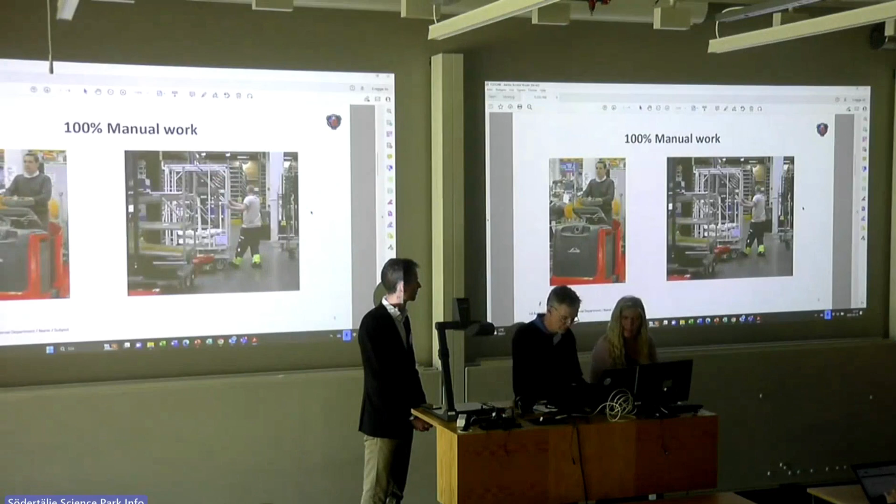So what we have been working with at Scania for quite many years now is train supply. Something around 2010 or something like that, we introduced trains to supply material from our picking platforms or supermarket to the line. So we have developed that during the years. We have a concept that's called mother and daughter.

So we have a fixed wagon, the red one, and then we have the carts, and they are called the daughters. So we can easily insert the daughters, go out to the line, and then take them out and supply them to the line. We introduced takt, so we know if the line is going in the takt. We also have logistic takt, so if the line stops, our train will stop. And we also have a specific way to configure the different carts. So it's working quite well.

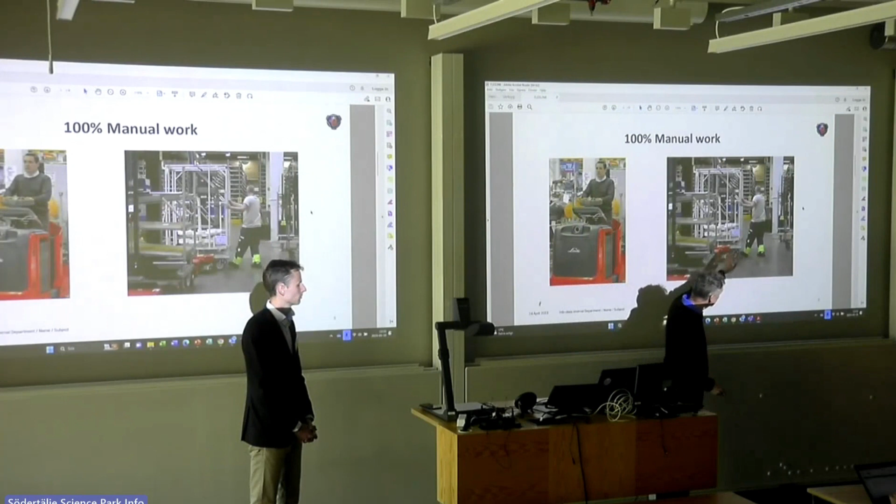But it's still 100% manual. So there is a driver driving maybe up to five wagons behind. And every time we supply, the driver needs to stop the train, go maybe 20 meters to the last wagon, and then manually take out the cart, drag it and push it into the line, take the empty one and bring it back into the train, and then go back. That's the way you do it.

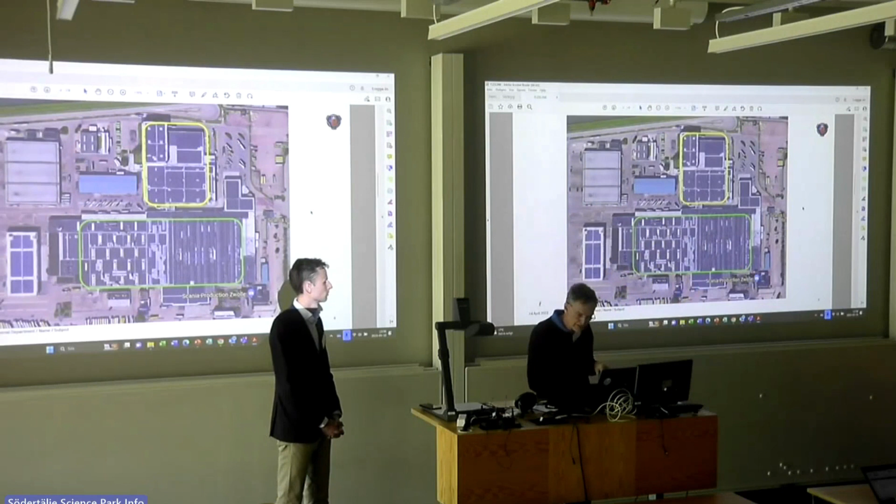And just to understand, we have different workshops and they are designed as they are, and that affects the solutions that we are looking into. So this is one example, the logistics in the yellow one. This is from Zwolle in Holland, and this is the production, the green one. So we go from the yellow to the green and bring the material, and it could be up to 900 meters, and all trains or material must pass this one. So you can imagine this is really a bottleneck. So they understand we need to have trains because we can't go one by one.

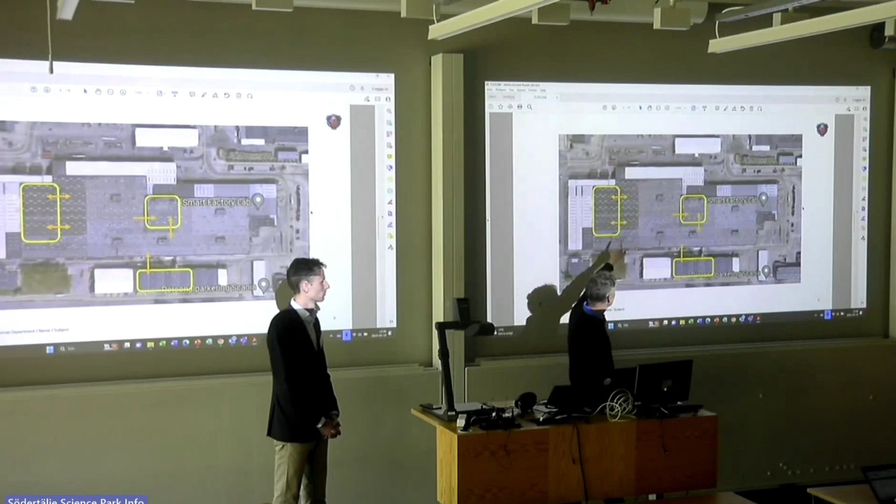If we look at another workshop in Södertälje, we have supermarkets more distributed. We have up to three areas and plenty of openings so you can easily go in and out. In this workshop, we will most likely go for single piece flow. So we take them one by one because the distance is much shorter. The distance to travel on a route is about 200 meters.

And then, of course, we have this big thing now that we are looking into. We would like to automate. The trend of AMRs and AGVs is booming everywhere. You can find a lot of automation in this area. And we want to have 100% automation. We want to deliver the parts to the line without any humans at all. And that is, of course, the challenge, especially with the train.

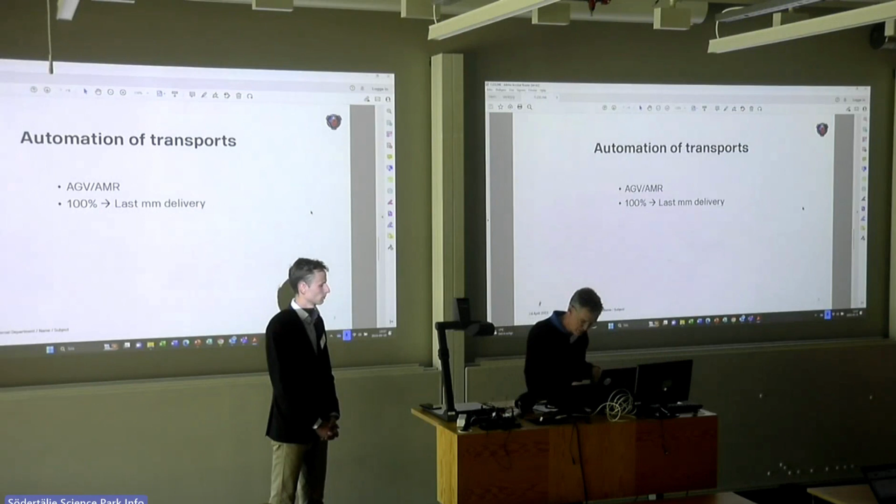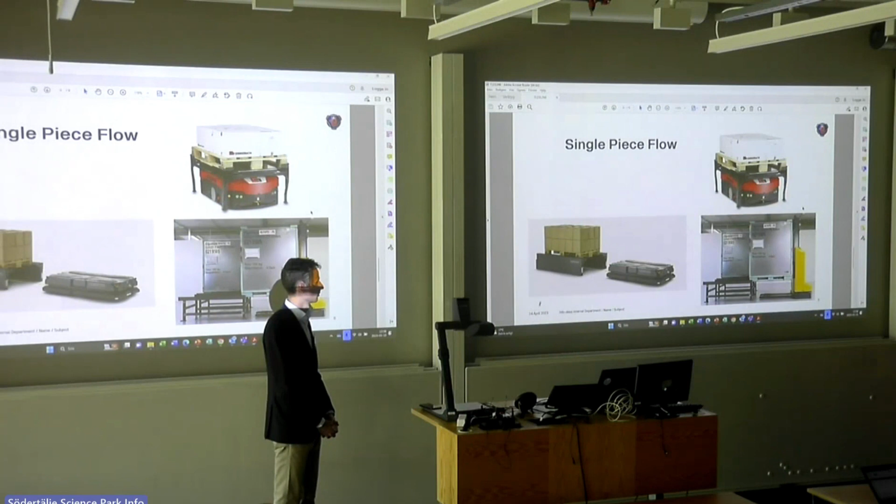So these are three concepts that we are looking into. We don't know yet which one is best. We are installing that one right now and that one, and we are looking into a solution for that one. So it's still a big area to understand what's best.

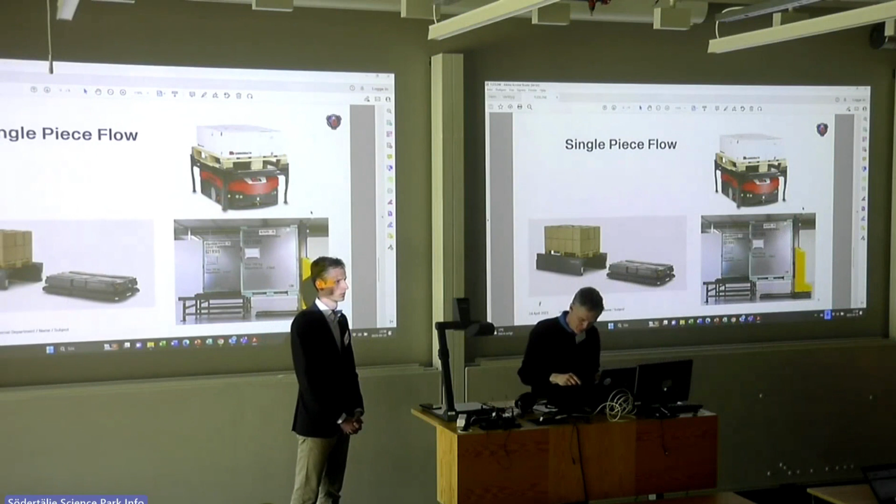And then, of course, how to do this with the train, and that's maybe the key thing here, because right now with the train we have automated transport, but there are still people today who do the transfer from the train into the line. The next step is, of course, how to do the last automation, if we want 100%. There are some concepts on the market, but we're not there yet. But this is the next challenge.

So either you can use this underride type, in this case you go under and lift up the dolly, and then you can bring it to the line, and then take the empty one and load the tray. This is another concept where you have more roller conveyors at the line, but then you need to align the train to that conveyor, and that is not easy.

It's maybe easy if you have a straight line, but if you have a line that goes a little bit like this, that concept will be very tricky. But that's something to continue to study. So that was the background, I would say.

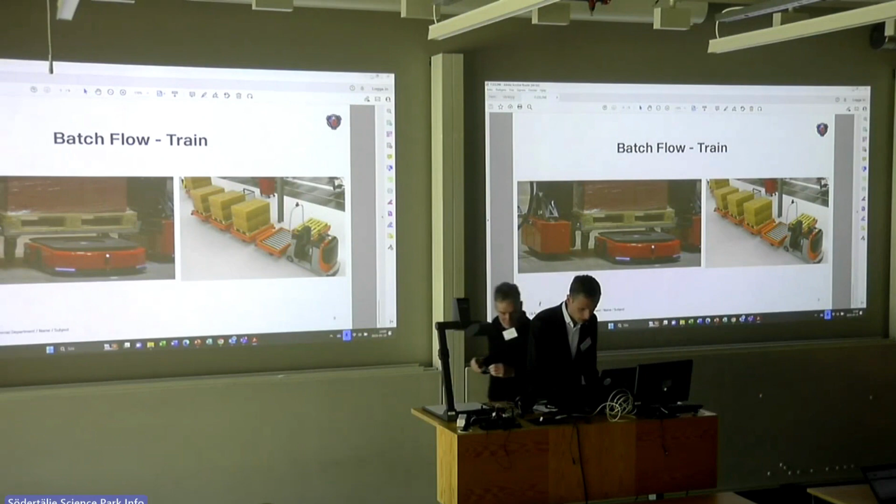So now I hand over to you, please. You. Like that.

Yeah, so as Lennart said, there are many challenges with these batch deliveries, and in this study that we have performed, we're looking into one of those challenges, basically the dimensioning, or how many AGVs you would need when you vary the load capacity, how many wagons you should include in that kind of batch delivery setup. In this study, it's been me, together with Robin Hansson, Patrik Fager, and Marcus Franzén.

So just to give you an idea, it's these types of tugger AGVs that we're talking about. They don't have a driver, and they make these deliveries in the assembly area. Previous research on AGVs is mostly focusing on single load AGVs, some kind of forklift AGVs or underride, and there's not that much focus on multi-load AGVs, having a load capacity larger than one unit load.

But there are some potential effects of using a larger load capacity. You could have a shorter distance per delivered unit load, less traffic in the environment, less risk for congestion. But there is also a chance that you get longer delivery times. Completing a delivery cycle takes longer, so it might cause waiting transport orders. And it can also be more difficult to control. You have to be able to utilize the load capacity in a good way to actually make use of these batch transports.

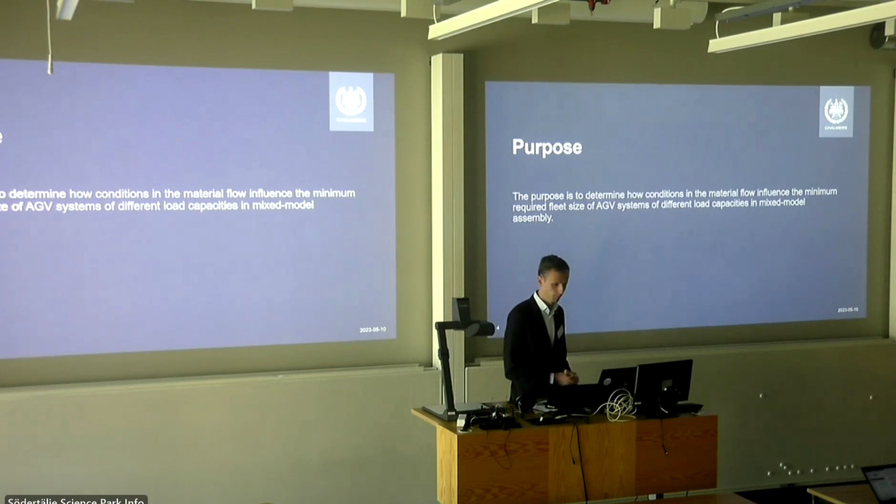As I said, single load AGVs have been in focus mostly, but there is some research looking into multiple load AGVs, looking at dispatching and scheduling, when to start the delivery. Often this is in job shop environments and not so much in mixed model assemblies. Some conditions have also been part of this research, but they have been used to test different dispatching algorithms, when they are suitable, but not so much the question we are looking into in this paper. And as I said, quite limited attention in these mixed model assembly environments.

So we have developed a discrete event simulation model, which has a starting point in an industrial material flow. So it's based partly on an actual material flow. In the current flow, this is performed manually by a tugger train, but we're looking into how it could be performed by AGVs of different load capacities. We have tried to replicate the demand in this material flow and how it is distributed over time, so how many transport requests are generated and how they're approximately distributed over time.

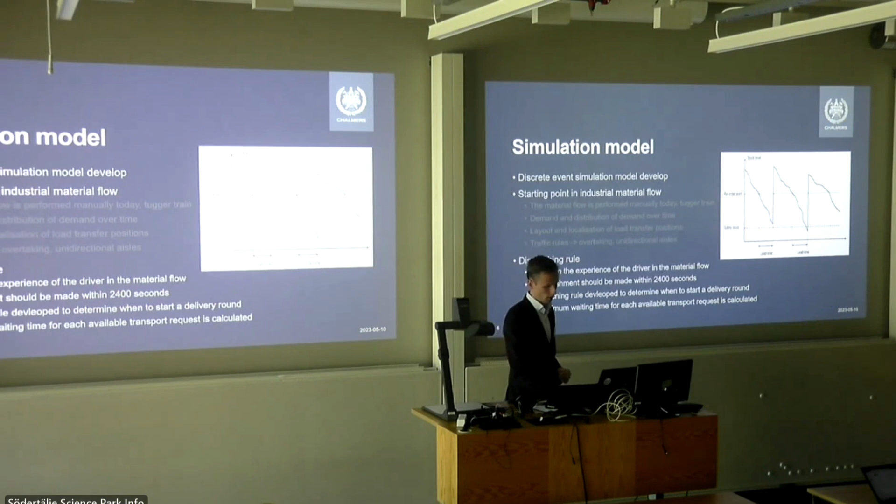I talked about material flow conditions before, and we have 4 conditions that we investigate: the production rate, the demand, how many transport requests are generated, the AGV speed, 2 levels here. We have also a variable for introducing some disturbances, and that should represent other traffic modes, forklifts, pedestrians, other tugger trains moving in the layout, which interrupt and cause delays in the transports.

And finally, we have this time window, which I talked about, the time from when a transport order is generated until it should be delivered. And as I said, we're looking into what is the required fleet size to meet the demand of this material flow.

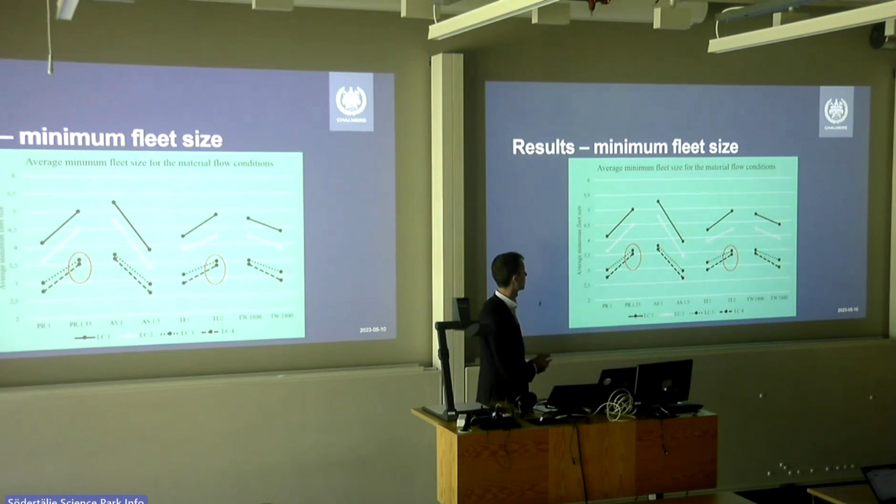And here we look at the average minimum fleet size, to see the effect of each of the conditions individually. You can also see that basically the reverse is true when going from a low AGV speed to a high AGV speed, or from a strict time window to a more lenient one, where the difference between load capacity 3 and 4 in the minimum required fleet size becomes greater again.

We can also see that the speed has the greatest slope basically for each of these load capacities here. And the single load drives by far the longest distances, so it's of course a positive impact here. And it's similar for load capacity 2, which also drives long distances in the environment.

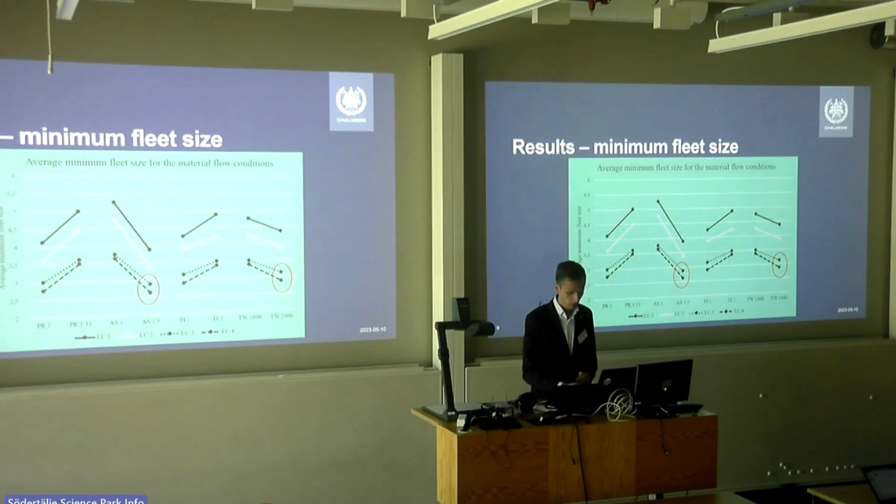Looking then into the traffic influence here, we can see that the slope of the curve is the greatest for load capacity 1, and this means that they have the largest fleet, and that they interact and cause congestion with each other, causing delays, meaning that a larger fleet size is required under higher traffic interference.

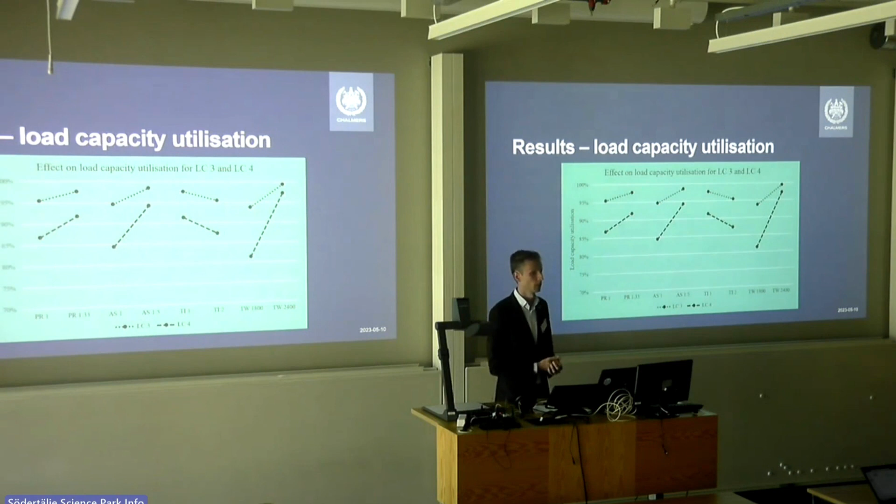I said before that it's important to be able to utilize the available load capacity in a good way to actually benefit from the larger load capacity. And in this case, we can see that for low AGV speed or strict time windows, for load capacity 4, the utilization of the available capacity is not that great. And as we saw in the graph before, the difference between load capacity 3 and 4 is quite small then.

Just a brief mention, there are also a lot of variations in this model in how transport missions are generated over time, which then affects the minimum required fleet size. Sometimes quite few missions are generated, while other times there are a lot more, and the fleet size should of course be able to manage the peaks in demand as well, so the deliveries are not made late compared to this time window I talked about before.

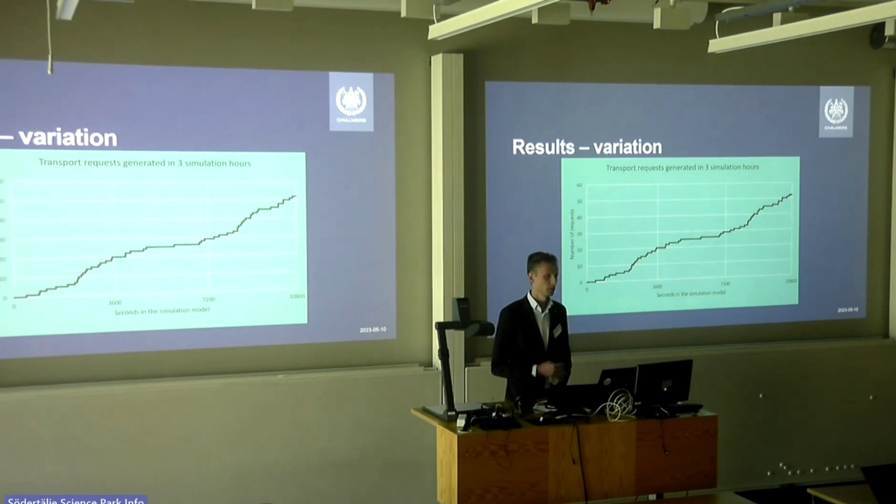As Lennart talked about, there are many practical challenges in how to make the actual move from the AGV tugger train to the delivery location and then back if there is a return flow or pallet back to the storage area. And in some cases, it might also involve moving leftover material from one bin to a new bin coming in, which is also a difficult issue.

But that is a potential for a future study. And there are, as Lennart said, some solutions being developed on the market, so something that we could look into in a future study. We could also, for this model, test additional dispatching rules, as well as look more into these variations, which we saw had quite a large effect on the minimum required fleet size.

Not in the model. It depends on which missions they collect. Yeah, they have a predefined route, and that's the one they have to pick. But if we go back to the layout picture, a human could possibly pick another one. There are some delivery locations here, for instance. But when departing from the storage, if they don't have any deliveries there, they can just drive past this one and continue. All right, so if it's in the planning, basically, that they don't have a pickup. Yeah, it's not due to congestion.

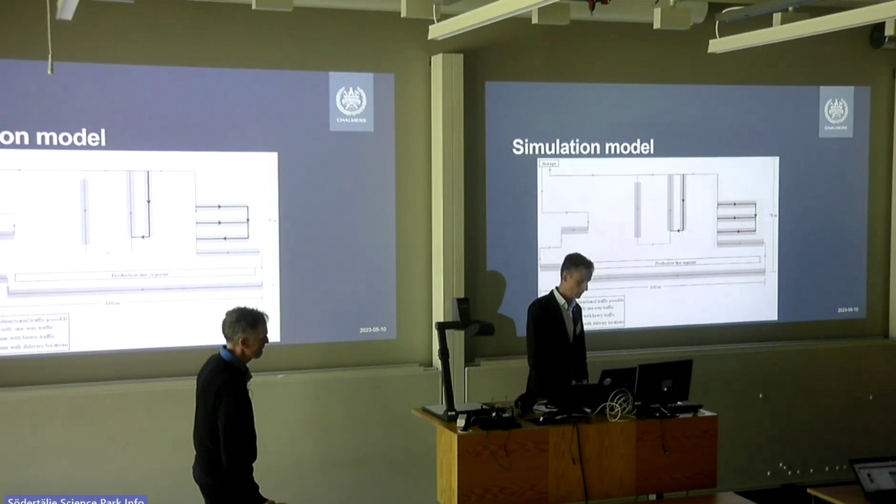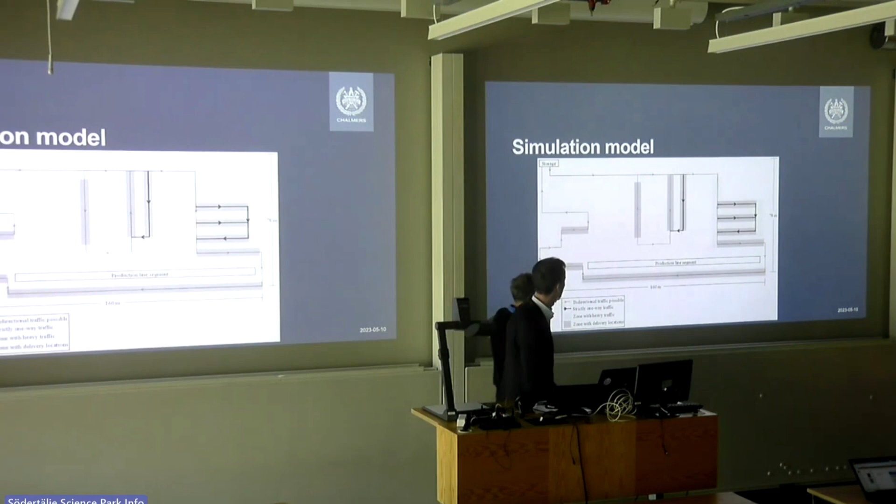But there are systems working, like a taxi system but for AGVs, that can see where all AGVs are, and then that system can assign a specific route to a specific AGV. That is possible. But also remember, in the starting point we will not start with 100% automation, so we will have a very mixed environment. In the beginning, you have very few AGVs. So then I also think it's important that we keep track of the manual forklifts. Right, because they might be doing little jobs.

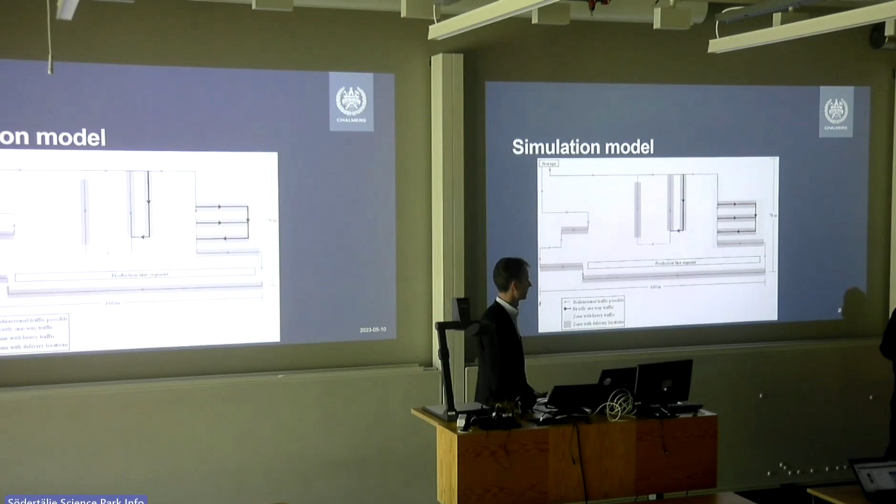Exactly. And maybe we should think of also giving the manual forklifts the routing, because today they decide where to go by themselves, but they don't know, for instance, if there's an AGV train standing in a specific area. So if they had that information, you can help the human to go another way, exactly like Google Maps is working, the map functionality in the car. That could be. There are companies working in that direction. But then you need localization services for the forklift, and of course there are different technologies to handle as well.

I was thinking, if we look several years back, we've seen a lot of non-value adding AGV transportation. They move around a lot. So can this train transportation solve some of the losses? Can you see any efficiency gains in using trains, where you maybe want to use a single AGV because it's automatic, but it would be better to have an electric train instead? I think in general, the longer distances you have.

There are other transports. Now we are going from the supermarket into the line, but we have interfactory flows, for instance, where we are transporting pallets from one factory to another. There for sure we can use AGVs as well. But I think with the train solution as we have today, we haven't solved the last meter delivery, and that's the big challenge, because every time you have another handover area, that will cost you extra handling, delays, and you need the planning for that area as well. And again, to run directly from the supermarket to the line, that is really tricky. That's my feeling at least. Yeah.

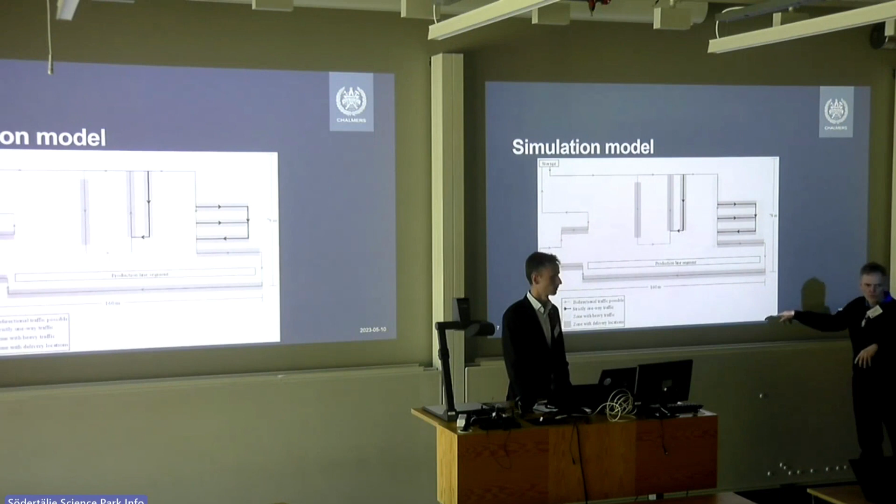Yeah, charging is a huge area. There are different ways of doing it. You could have contacts, you can have wireless charging, in loop charging, or separate rooms to do the charging. So it's definitely an area to look into. It's important. Another thing, of course, you can charge the AGVs during breaks, so there are other opportunities to charge.

But I know, for instance, in Zwolle, that's actually a good thing with the tow train. They have chosen a battery that can last over a shift, two shifts. So that is not a problem with the tow train solution. But when it comes to smaller AGVs, yes, we need to charge them during production or the opening time.